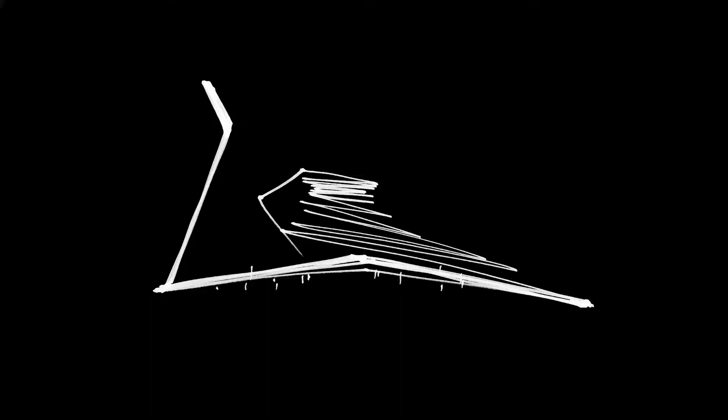Every place has its own time, and the time pulsates. Sometimes it is solid and has a lot of events, when many people unite their efforts to space the time, making new meanings, leaving behind them signs, places of power. But sometimes time dies away, delays, becomes an expectation.

Chernyakhovsk falls into such time for the years after the Big War. Distraction, disconnection, and silent expectation of new meanings.

Chernyakhovsk is a town located in Kaliningrad region. This territory goes in drift like an island. It has no borders with its own country, the Big Land. Such result was disposed by the history of wars and captures.

Here is a point where the West and the East stop today. Traces of the last war still have not vanished from the streets and memory. Reunion, but not a conflict, is the main idea of our project. Factory Alliance 1892, for which we developed our project, was named in memory of the union between Russia and France.

The project task was to design the barrel warehouse. Old clock house and office building remained on the territory. We relocated the clock house for the shortest ways and parking for employees. Also, it was necessary to reserve the site for the future whiskey plant.

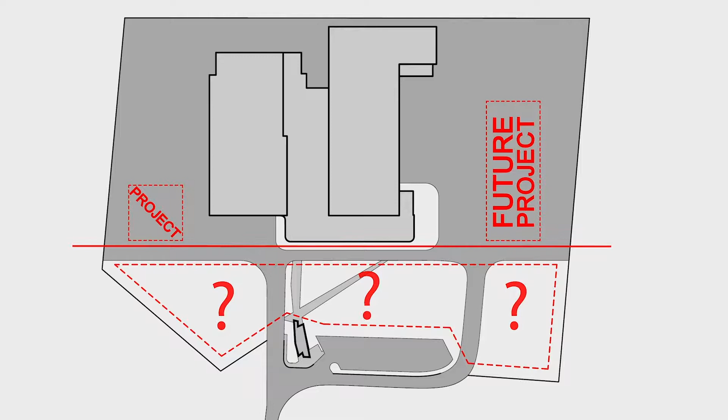We shifted both new buildings to the front side with the park between them. Thereby, in the first phase of the project, we created the base for the future development and transformation of a part of the factory into the new public space.

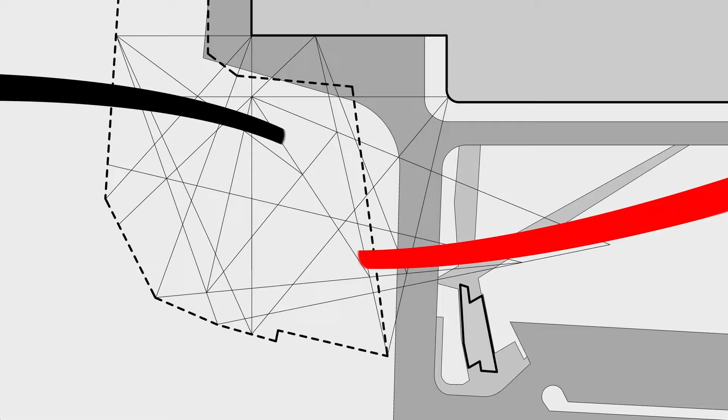We linked corner points of the existing objects and in such way created a geometric platform for the future project. Degustation room with a presentation space were added to the main function areas. Hence, the building divided into two parts, storage and presentation of the product, and gave us the reason to create two interconnected forms with common inner space.

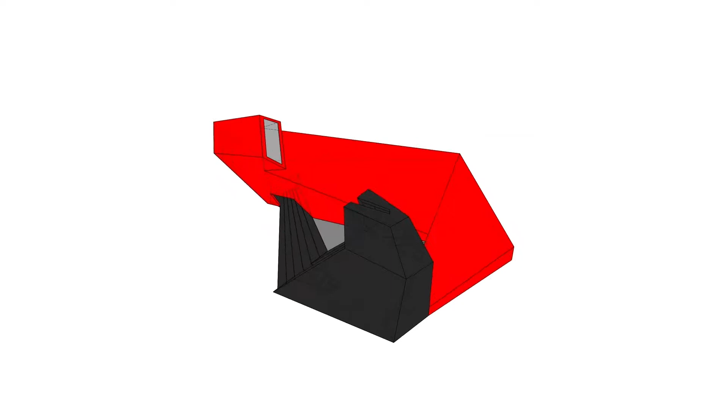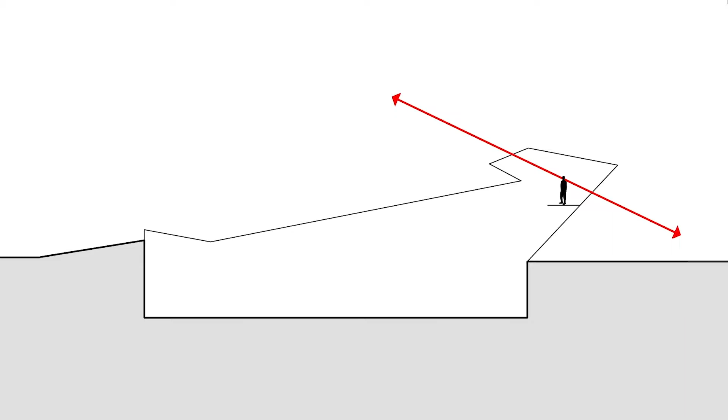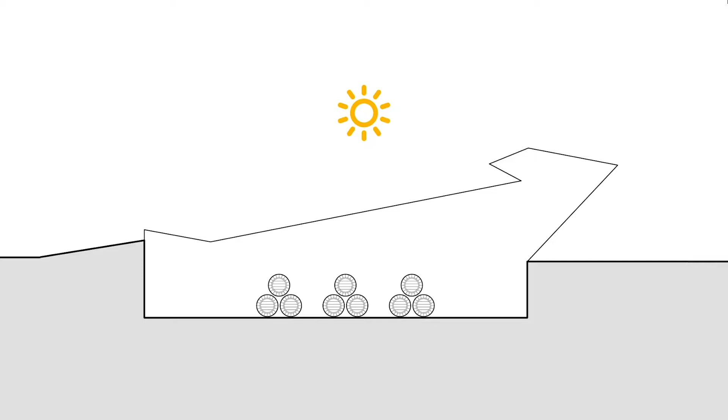We placed the warehouse under the ground. It allowed us to reduce digging works using the old excavated pit, reduce the overground part to organize cross views, use the remaining ground for new landscape, place barrels in the space with minimal temperature fluctuations, reduce expense for heating of the huge warehouse, and keep stable humidity.

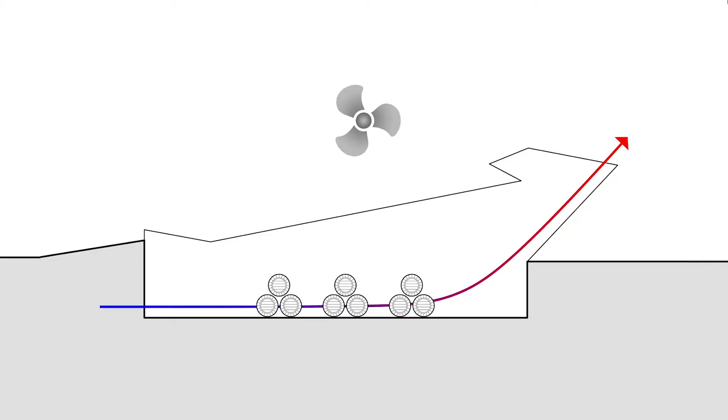Also, we refused electrical ventilation systems using the chimney effect. Rainwater is collected from the roofs for irrigation of lawns. Thus, we shifted construction cost from production purposes to public spaces.

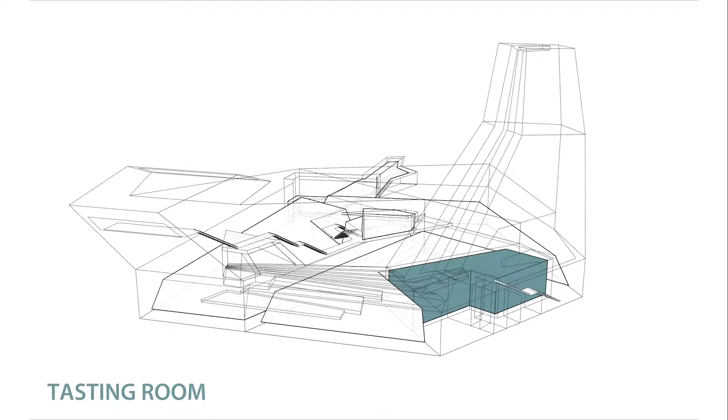Now let us introduce the building plan. Main entrance, warehouse as the main part of the basement, loading dock and emergency exit, degustation room, tower museum, plant, and the utility rooms. Viewpoints are connected through the stairs and pathways.

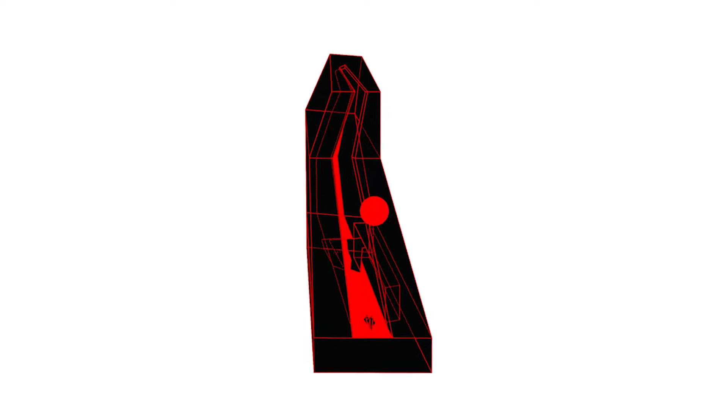Public space between towers. Towers are located in such a way that the morning sun enters into the metal tower vertically, illuminates its structural frame, and penetrates to the depth of the degustation room. The low western sun penetrates to the wooden tower and for a short time illuminates the park through the horizontal openings. In this way, east and west merge.

Rambling, fragmented, and rubbish space, which met us the first time, we filled with the idea of coherence, interaction, and dialogue. West and east, internal and external, full and empty, man and woman, iron and wood, sky and ground, storage and distribution, technology and tradition. Here is just a small list of the couples which formed the meaning of our project.

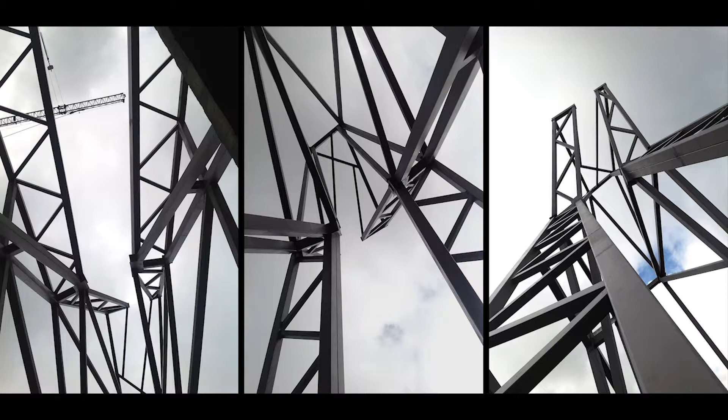Teutonic knights who established the town, transparency of presentation, Gothic preciosity of vertical structure, refer to the concepts of sky, man, west, verticality, transparency, and emptiness. Metal and glass are the basic materials of the form.

Transparent floor ceiling of the inner space unites the vertical of the museum and horizontality of the warehouse through the degustation room.

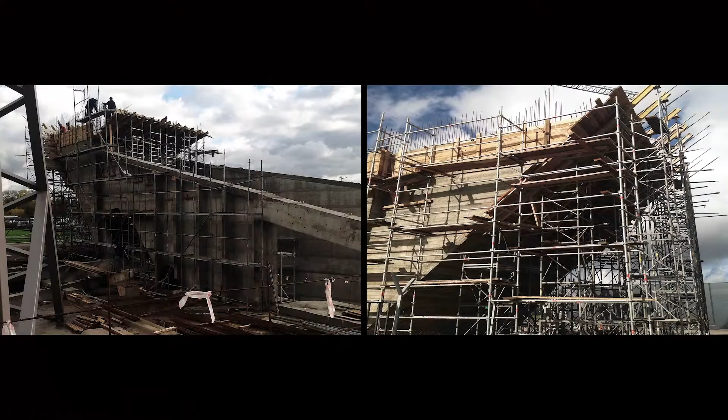Traditional materials and the method of construction refer to the traditional wooden house, an ancient way of preparation and storage of the brew in the barrel, located deep under the ground. Wooden tower is horizontal, united with ground, grows from it, and it works as the basement for the whole complex. It associates with female pregnancy, with naturalness, fullness, and east.

We hope that new architecture created on the basis of interaction and interpenetration of the opposite meanings, ideas, forms, which form a unified indivisible whole, will become not only the symbol of this territory, but symbol of the town, place of power, and proclaim the end of the epoch of disconnection.

Also, we hope that after construction of the new whiskey plant with our design, which is in the beginning now, the complex will be more available for citizens and visitors of the town.

We needed to create a model for exhibition. It was the 4th year of the project, when we surprisingly saw dancing figures of a man and a woman in flat elevation patterns.

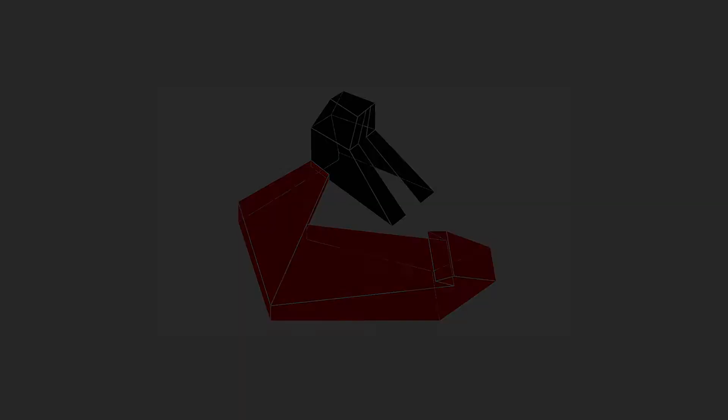One gives birth to two. Two give birth to three. And three give birth to all things and all beings. All beings bear the negative physical form represented by yin and embrace the positive true nature represented by yang. With the union of these two, they arrive at a state of harmony.

By means of spacement of the time and temporalization of the space, the architecture links together the fabric of dimension, creates a point of dialogue, forms and form. Two shapes of the building create human space between them, and united together they give birth to the third shape. The great triad, ground, human and sky, symbolizes infinity of changes.

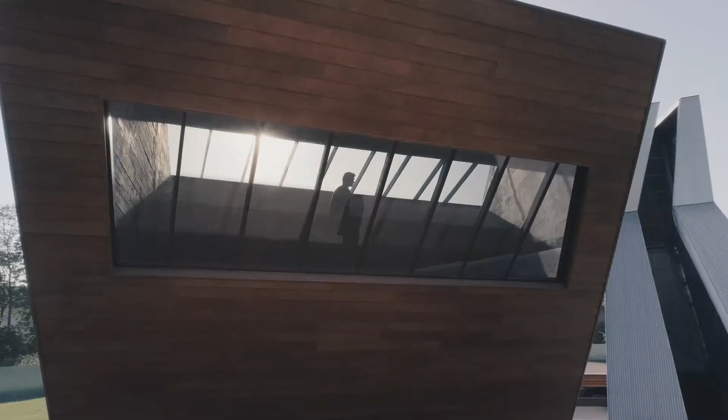This project once again put the following questions to us. What architecture is? What is the main thing in the project? What makes a building alive? What is its naturalness? The answer appeared in metaphor.

The bird is not wings, beak, tail or feathers. The bird is flying. It is not a flight for a certain destination in a certain time, but it is a flying. Flying is the naturalness of the bird, and the concept of architecture as flying, when the body and the emptiness are transformed into one whole and one in time and space, has been inspiring us during all these years, while the architecture was born and the building arose.

The vision without separation is the way of life.